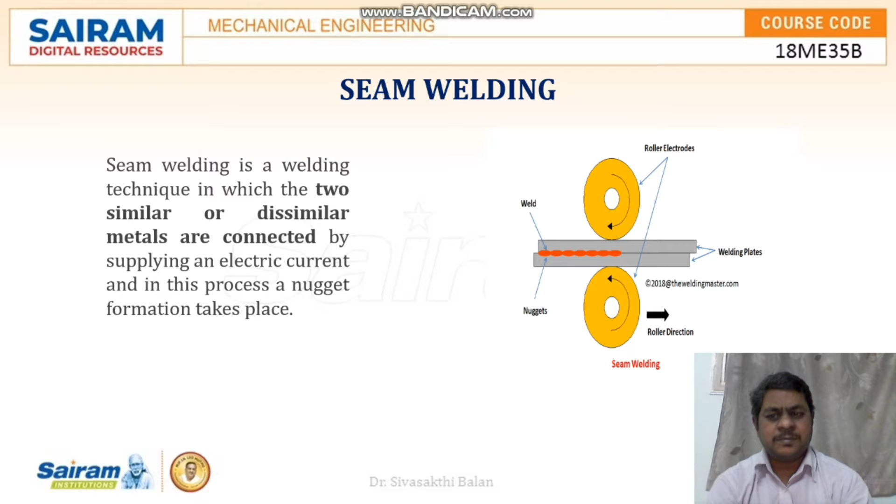Seam welding is a welding technique in which two similar or dissimilar metals can be joined by supplying electric current. This video shows or explains the working of resistance seam welding.

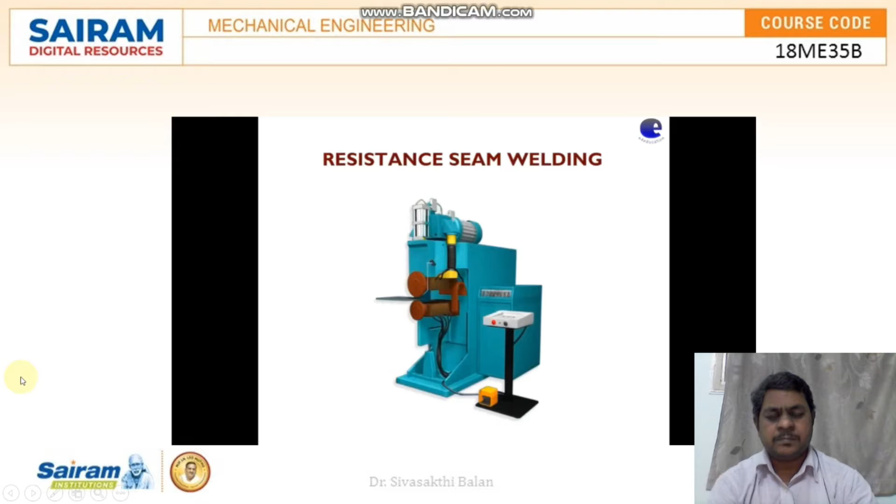The metal pieces are kept together. This is the resistance seam welding apparatus. These are two wheel electrodes, and the workpiece is kept between the two electrodes.

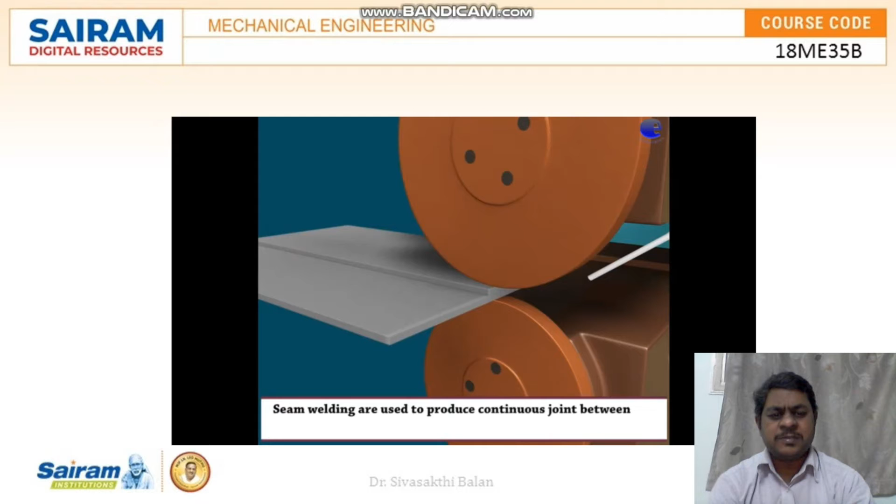Seam welding is used to produce a continuous joint between two workpieces. The workpieces are placed between two rotating wheel electrodes. When electric current is passed through the electrodes, high heat is produced on the workpiece between the wheels.

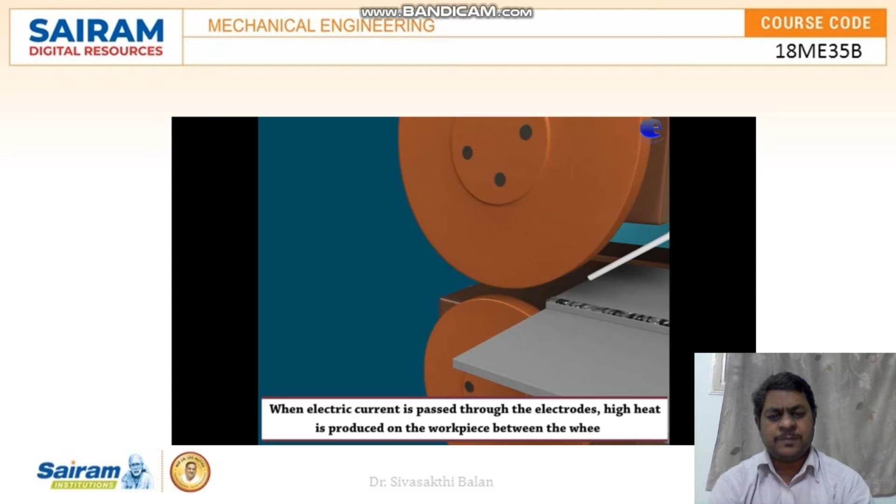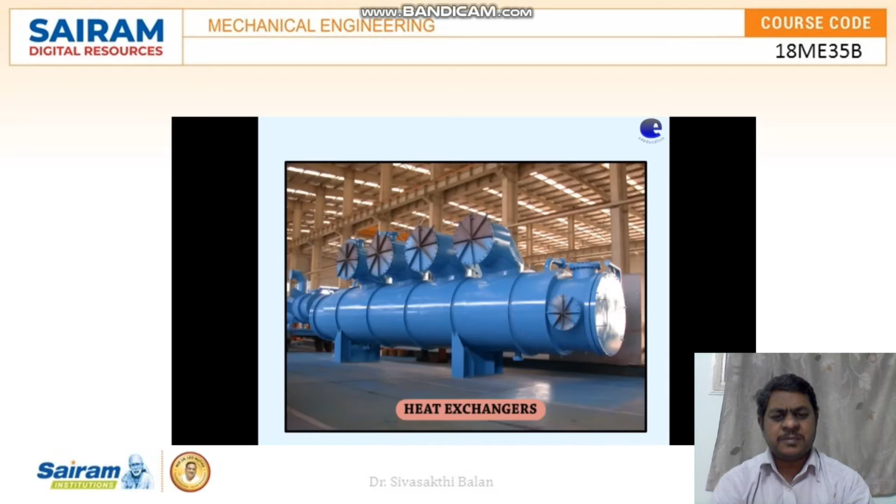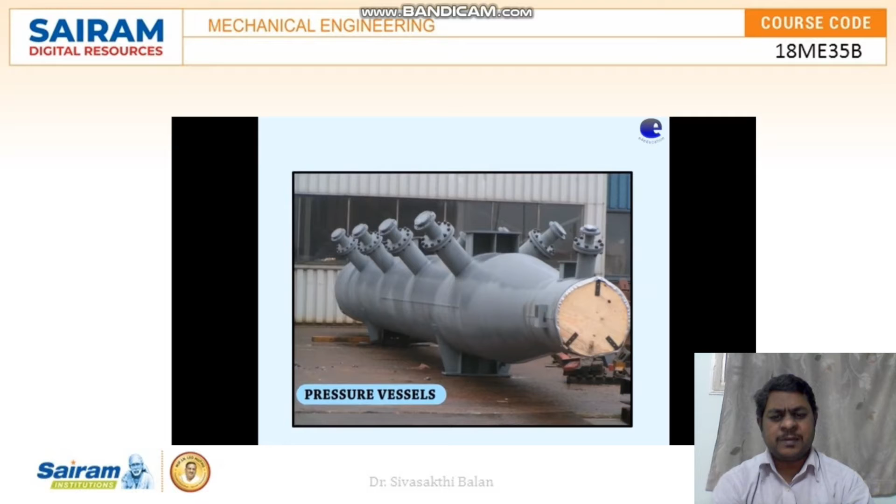Applications of resistance seam welding: it is widely used in brewery tanks, container fabrication, heat exchanger fabrication industries, motor case fabrication industries, nuclear component fabrication process industries, and pressure vessel fabrication industries.

The advantages of seam welding: this welding is popularly known for forming a clear weld. During this process, no gas is formed and no fumes are emitted. There is no need for any additional filler material during the welding method. Seam welding can be automated, so there is no need for additional labor. This welding process produces both parallel seam weld as well as single seam weld at the same time.

The disadvantages: it is not applicable for metal pieces above a specific thickness. It is not possible to weld some complex places. It requires a skilled operator to do these operations. The machinery used in this welding has very high prices and it is not easy to afford.

Applications: it is widely used in the manufacturing of all types of barrels, aircraft tanks, refrigerators, oil transformers, etc. It is also used to weld stainless steel, nickel alloys, and magnesium alloys.

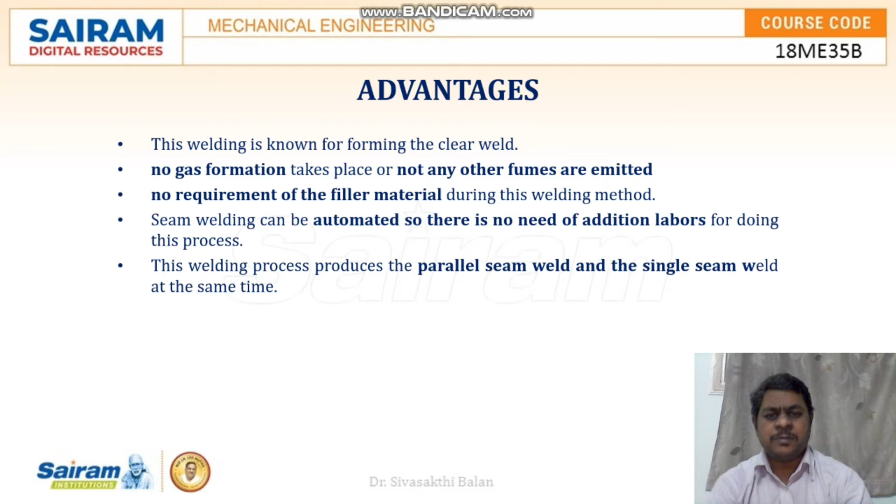Advantages: this welding is known for forming a clear weld. No gas formation takes place and no fumes are emitted during the process. There is no requirement for filler material during the welding method. Seam welding can be automated, so there is no need for additional labor. By doing this welding, we can produce both parallel seam weld as well as single seam weld at the same time.

Disadvantages: it is not applicable if you have metal pieces above a specific thickness. If you want to make a weld at some complex place, this process is not suitable. A highly skilled operator is required for doing this operation. The machinery used in this welding has a very high price.

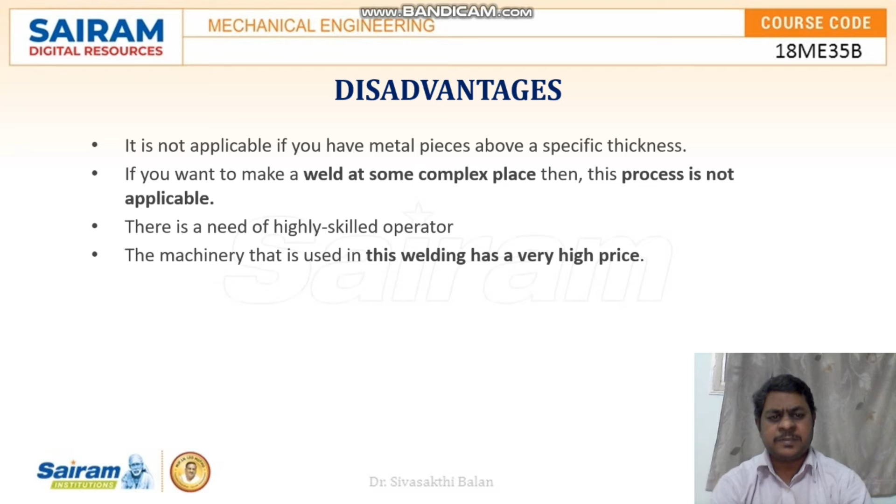Application: this welding process is widely used in the manufacturing industries for barrel fabrication and pressure vessel fabrication. It is also used in the fabrication of aircraft tanks, refrigerators, oil transformers, etc. This welding is used to weld stainless steel, nickel alloys, and magnesium alloys.

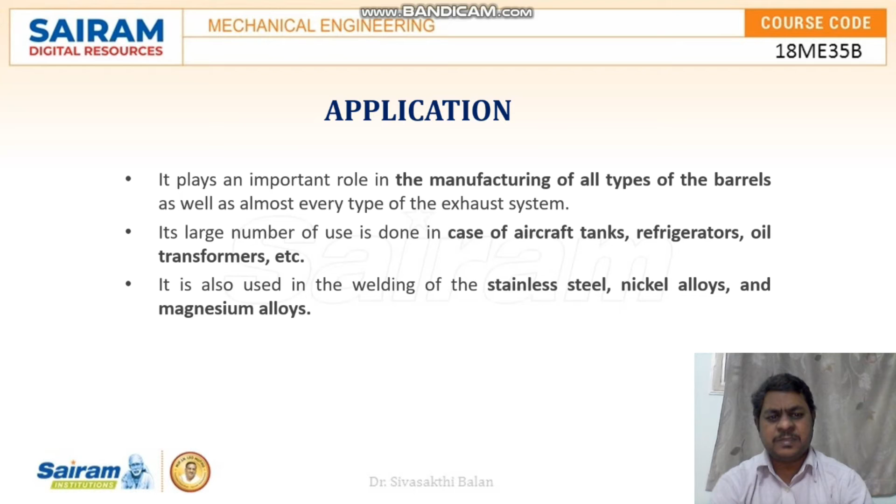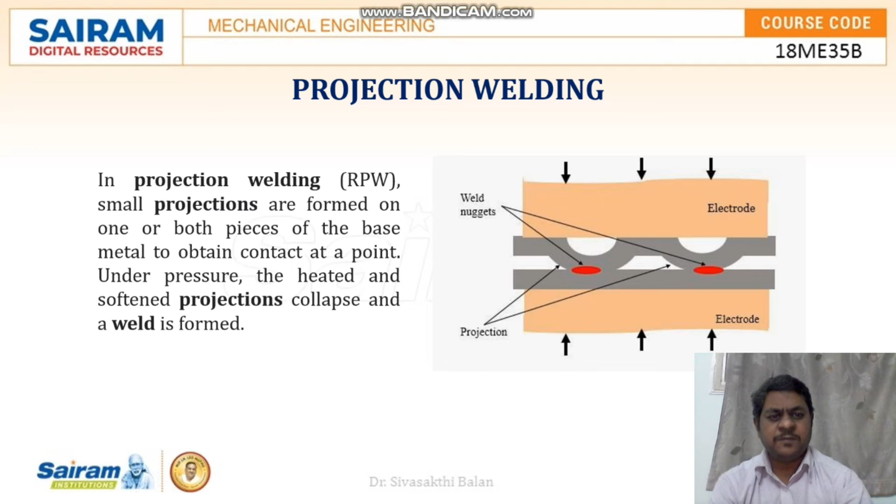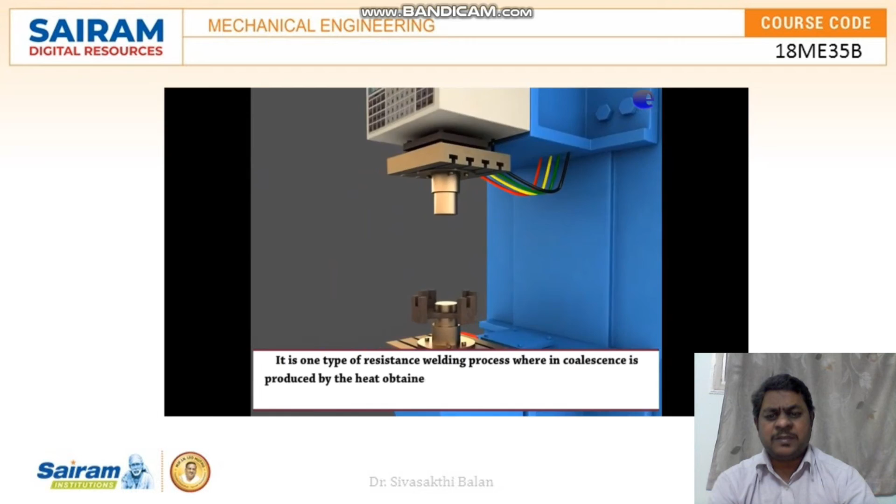In projection welding, small projections are formed on the metal bases. Under pressure and heat, these projections collapse and thus a weld is formed. This is the projection welding apparatus setup. It is one type of resistance welding. It joins metal pieces by heat obtained from resistance to electric current flow through the work parts, held together under pressure by the electrode.

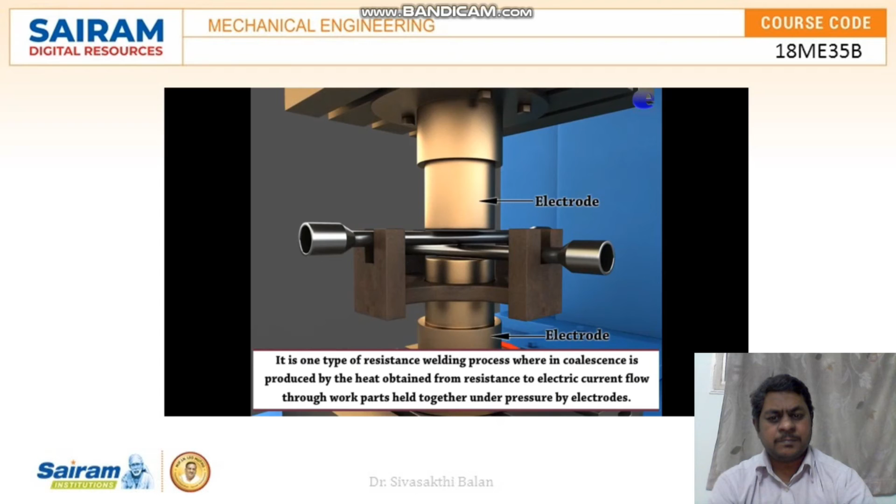Electrodes are cooled as in spot welding. Since a number of welds are made at each operation, both the electrical power and mechanical pressure must be correspondingly greater as compared to spot welding.

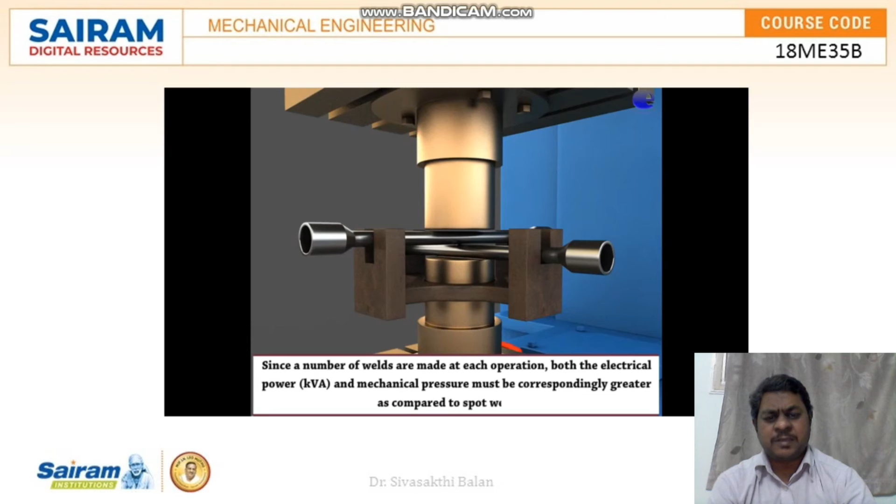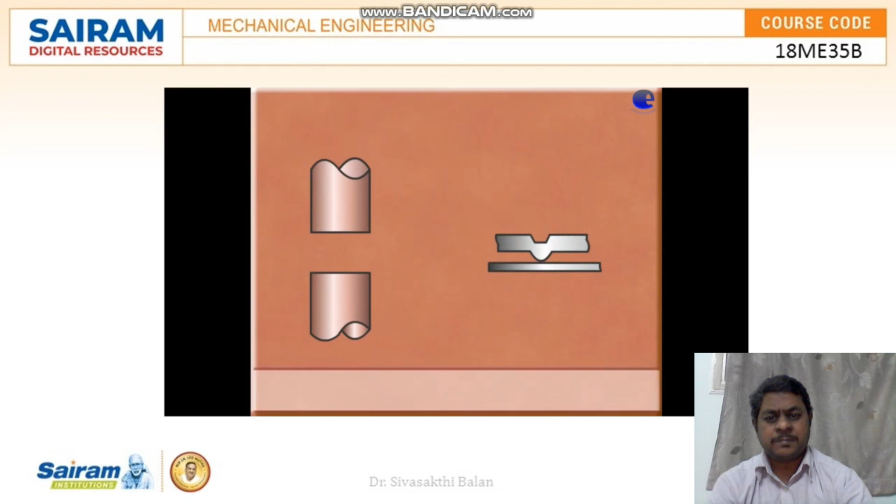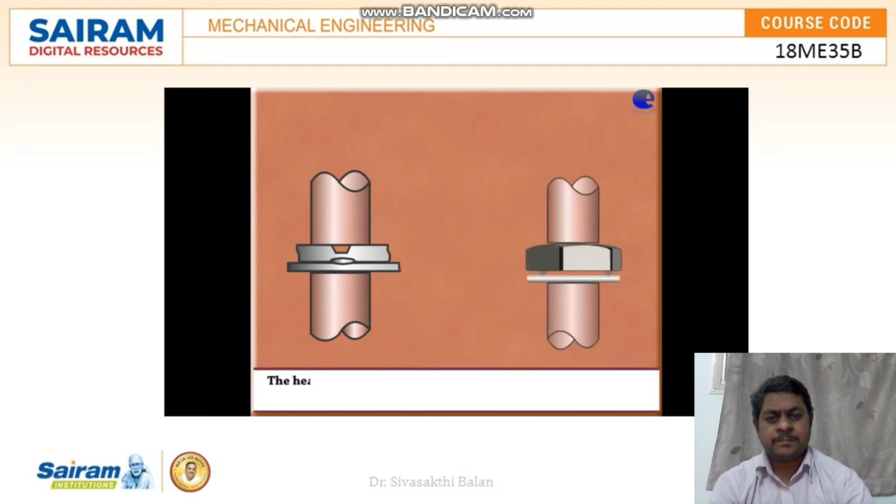The projection in the upper piece is held in contact with the lower piece under electrode pressure. The current flows and, being localized to the region around the projection, heats the metal in that area to the plastic state. The heated and softened projection collapses under the pressure of the electrode, thereby forming the weld. Flat electrodes are used as against the tip electrodes in spot welding.

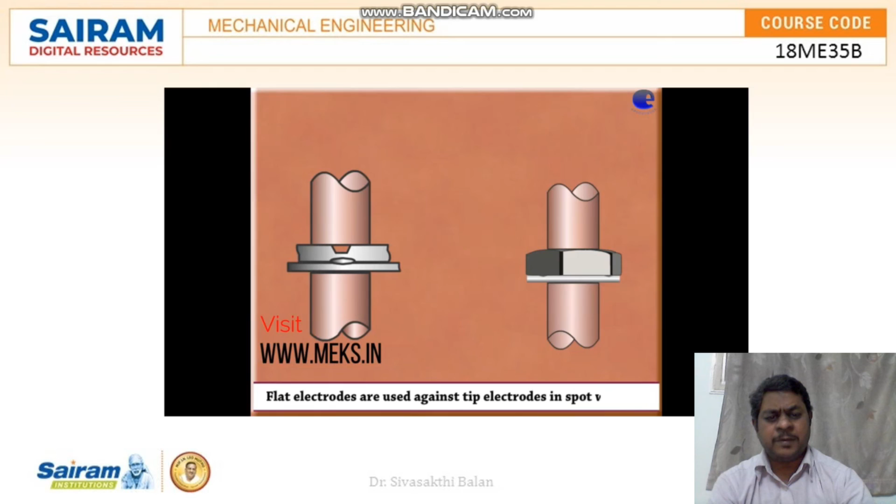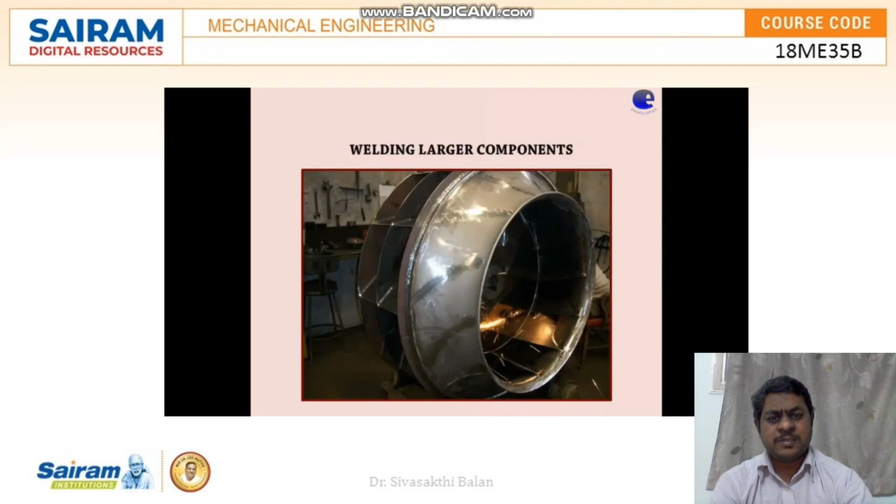Applications of projection welding: crosswire weld, refrigerator condenser, small fasteners and nut fabrication, welding larger components, etc.

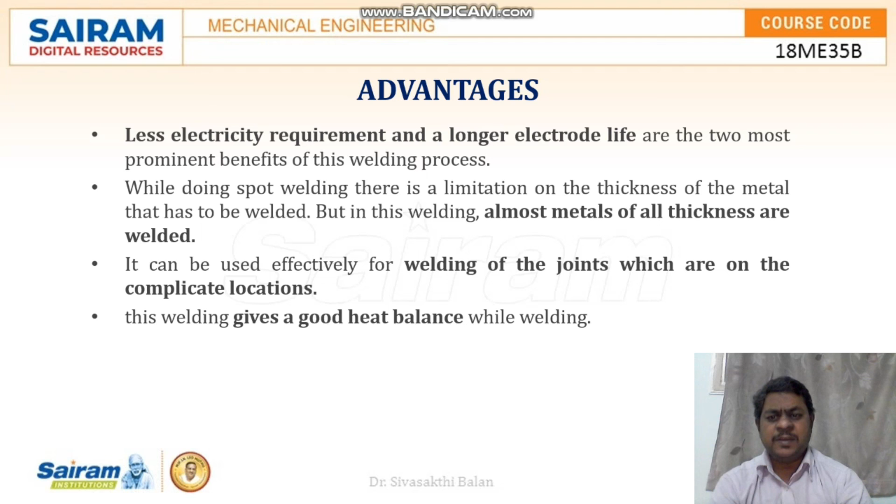Advantages: it requires less electricity and the electrode life is much longer. Almost metals of all thicknesses are welded by this welding process. It can be used effectively for welding of joints which are in complicated locations. This welding gives a good heat balance while welding.

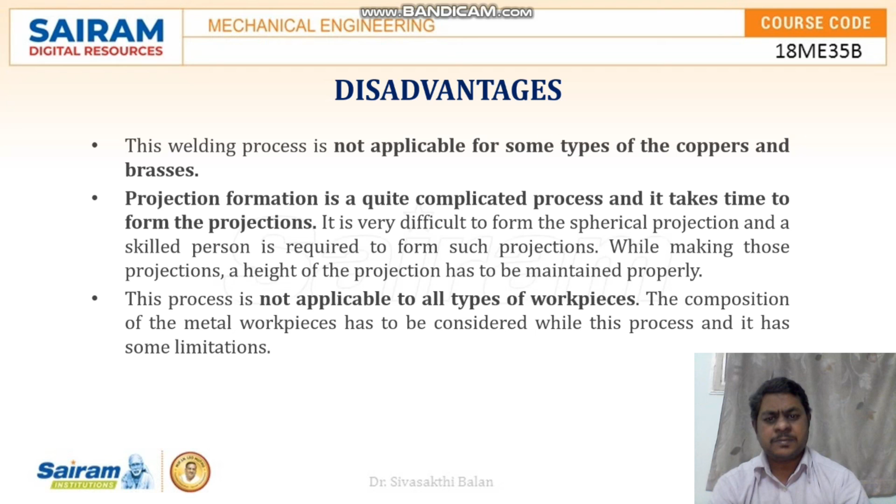Disadvantages: this process is not applicable for some types of coppers and brasses. Projection formation is quite a complicated process and it takes time to form the projections. This process is not applicable to all types of workpieces.

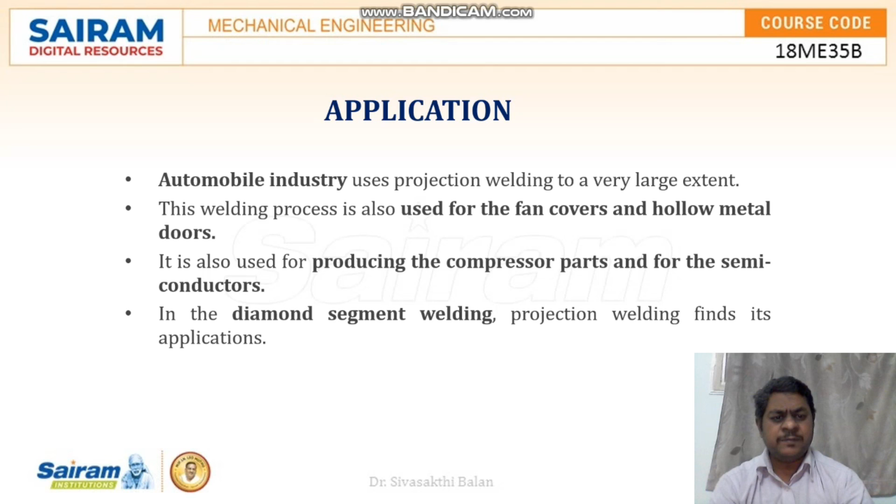Application: it is widely used in the automobile industries. This welding process is also used for fan covers and hollow metal door fabrications. It is used for producing compressor parts. In diamond segment welding, projection welding finds wide application.